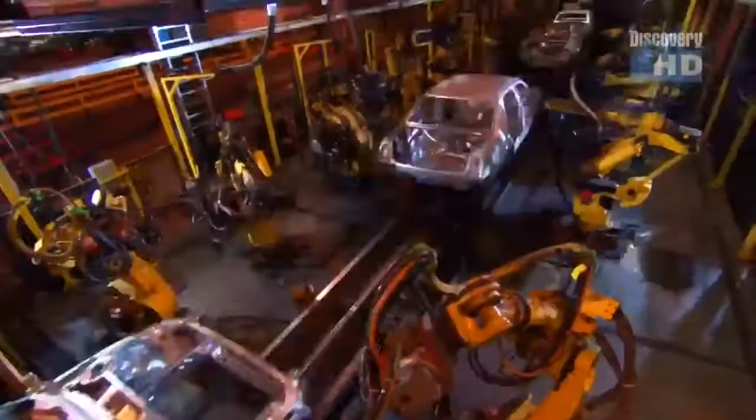The computing power of cars will be almost unlimited. As digital power increases, so will our safety, so will our productivity, so will our quality of life. We won't have to drive our cars. Someday, they will be driving us.

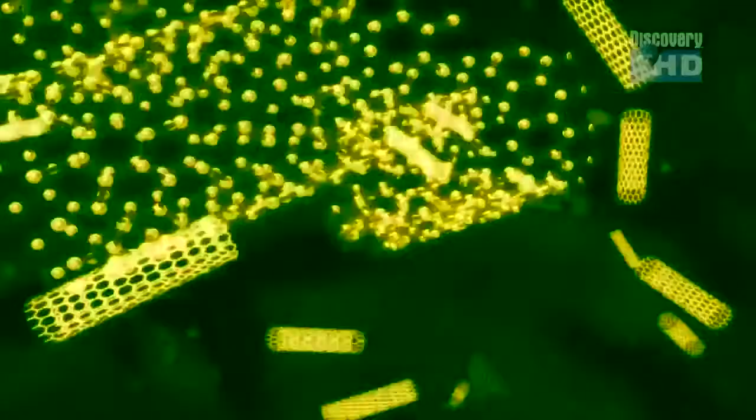The information processing capability of an automobile is very impressive today and is going to become extraordinarily more impressive in the future. The application of nanotechnology, artificial intelligence, and microsensor technology will shake everything up concerning our car.

It knows where you are. It knows where you're going. It knows what you want to do.

I'm always enchanted by truly autonomous machines that sense and think and act for themselves. Humans might see oncoming traffic from the side, but wouldn't measure the approach, distance, or speed the way that sensors could. So in 10 or 15 years, we expect cars will be able to drive through your neighborhood and understand the difference between a ball or a child and other cars on the road, and be able to stop and be as safe as a person driving, maybe even safer.

Red Whittaker and Chris Urmson of Carnegie Mellon University believe in the future of self-driving vehicles. They have taken up the DARPA Autonomous Vehicle Challenge, a competition sponsored by the Defense Department with the aim of sending unmanned vehicles into enemy territory. The results will affect how every one of us will be driven in the future.

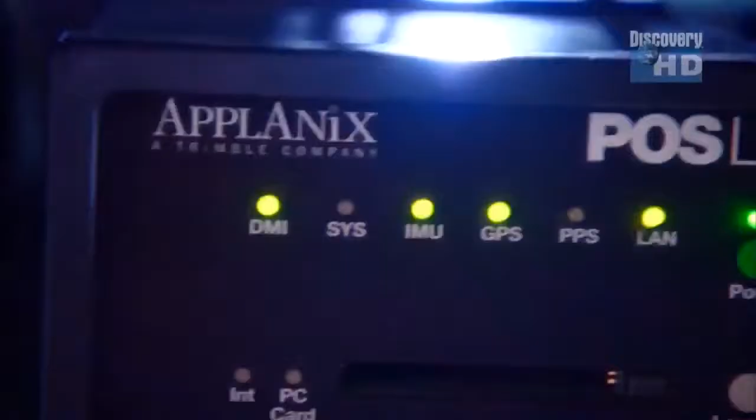The screen here is control; we have to turn the vehicle basically into a robot. It allows us to electronically control the steering and the indicator lighting, and it's the interface between the car and the computers. If we were to sit here while the robot was driving, we'd see the steering wheel move, we'd see the pedals move. It would be like there was an invisible person driving.

The Carnegie Mellon car is no different from what you drive now, except that your SUV doesn't have 10 Core 2 Duo computers, each sporting a gig of memory.

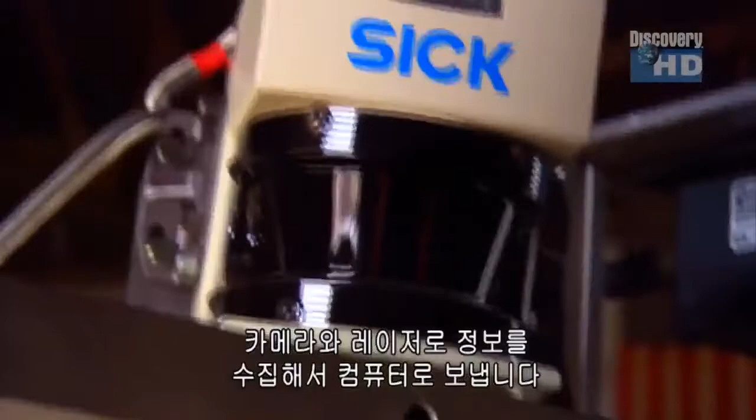We take the camera and the laser data and feed that to the computers, where we have algorithms that interpret the images from the camera and the shape of the ground from the lasers, and they figure out where the road is. From that, the robot will send an electrical signal up to a controller, which will turn the motors to steer the vehicle and press the brake and throttle to keep it moving at the right speed.

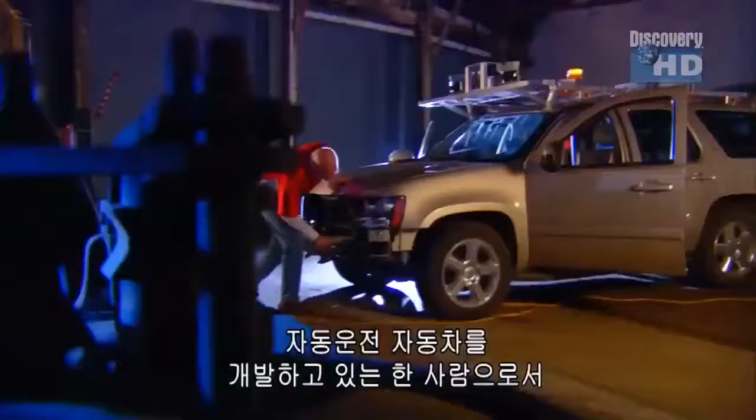It's one thing to talk about autonomous driving in theory, but what will it take for computer-driven cars to truly gain widespread acceptance? In automation, performance is only a small part; reliability is everything. To be accepted and used, the technology has to be rock solid. As a developer of autonomous driving machines, I am perfectly comfortable being driven by a computer. To get this far, this fast with computing opens a huge future possibility.

The day is coming when your car will be the most powerful computer you own. It will have a brain 10,000 times faster than yours, connected to you. And then, technology will plug you into the auto matrix. The car, the machine, will think, act, and drive. The day is coming.

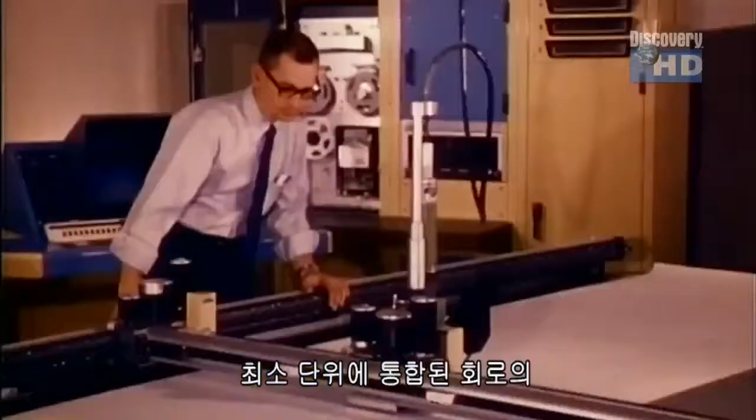But before there will ever be an auto matrix, before our cars will change the future of driving, we must look back to a man named Gordon Moore. In 1965, Gordon Moore, co-founder of Intel, observed that the complexity of integrated circuits with respect to minimum component cost doubles every 24 months. Translation: computers get twice as smart about every 2 years.

Think of a birthday card that you get in the mail that sings happy birthday to you. There's a chip in that birthday card that has more computing power than all the Allied forces of 1945. And what do you do with it? You throw it away in the garbage. That's Moore's Law. By 2030, computers and cars will have more than 3,000 times the processing power they have today.

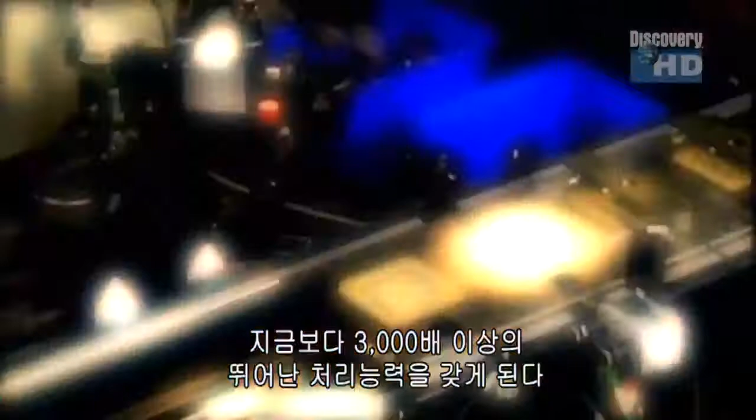Chips then will cost about a penny. So chips will be embedded by the billions in the roads, inside the car, everywhere around us.

My name is Michio Kaku, and this is my testimony about the future.

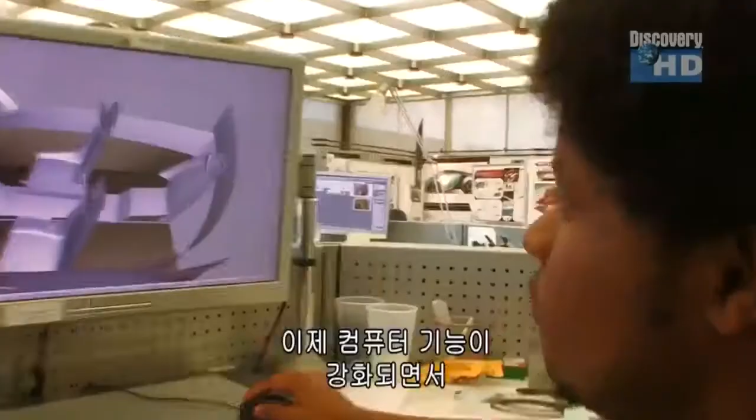Computation will be everywhere, almost like electricity. Electricity today, we don't even think about it. Now, with computer power doubling every 18 months, the car is the next place to be totally revolutionized.

But can all this technology make us better drivers? Wouldn't it be nicer to have a computer that senses the rhythms of your body so that when you doze off, it wakes you up? Think of how many lives such a simple device could save.

The first step towards ultimate safety in future cars can be seen in Switzerland and the world's most sensuous car. The sensor tries to influence the driver to be relaxed, to be attentive, and make him safer this way. The idea behind the sensor is really to get to the cause of the accident. The cause of the accident is the human being.

A biometric watch measures the driver's pulse. A mobile eye camera records his lane change behavior, as well as how close and at what speed he approaches cars ahead of him. An onboard computer uses special algorithms to evaluate the driver's current state of mind, and if necessary, it steps in to change things.

If you should be starting to fall asleep, you start to hear a generic sound which stimulates you. If you should be aggressive, you get to hear more chill-out type music, lounge music, to calm you down, to feel relaxed. A driver's emotional state is also affected by light.

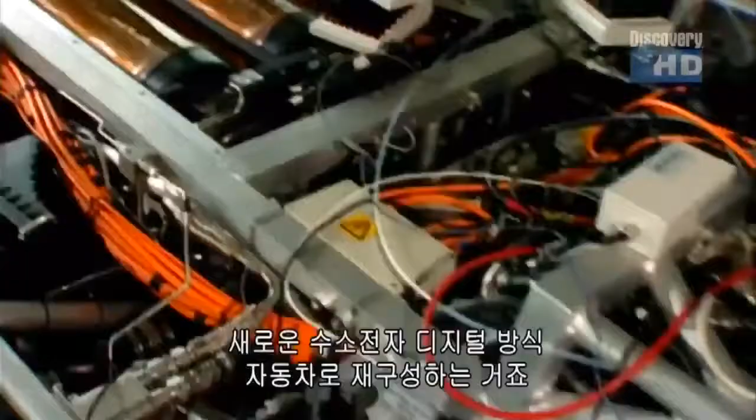We are on the brink of changing and rewiring, rewriting the DNA of the car, from the old mechanical internal combustion mode to a new hydrogen, electric, digital-based car.

As the electronic brains in cars get smarter, mechanical connections for steering, braking, and accelerating will give way to digital controls with lightning-fast response like a video game. It's called drive-by-wire, and with it, your car handles and responds exactly the way you want it to.

For example, brake-by-wire allows the vehicle to stop sooner than conventional hydraulic brakes do. It's like turning on a light switch and the light comes on immediately.

The thing that helps you get emotionally attached to your car is actually going to be delivered via software. The chassis dynamics, the way that the vehicle moves up and down when it goes over bumps, also can be controlled dynamically, and even the traction and the torque at each wheel.

And if your mood changes, your car can change right along with you. The auto industry is as much an entertainment industry and a fashion industry as it is a transportation industry. You'll be able to download performance profiles for your car the way you get ringtones for your cell phone.

Custom software is one more step towards a future when cars will do everything for us. And while that day is not here yet, young car designers like Matt Zoller of GM's Design Internship Program are already there. I love the idea of being able to break the mold, to create something new, something different, and be able to bring that to other people.

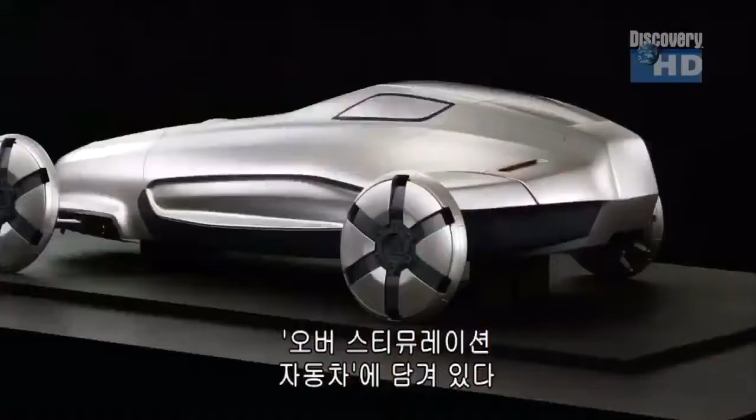His digital dream for the future is a concept he calls the overstimulation car. It's a one-seat car that totally consumes this person and creates a virtual mobile world for them to ride around in. There'd be holographic imagery.

You have menus scrolling, so you're in the world and you're experiencing it, but you're experiencing it in the way that you want to through this virtual driving, and really get a feel for this online community of cars that are driving down the road.

Cars will become members in a worldwide network. It's almost like an auto matrix in terms of the connectivity of the automobile with our everyday lives and everything that we're doing.

Cars locating wireless internet signals will require vehicle antennas that work consistently, perfectly. Whether it's satellite radio, GPS, or onboard wired and wireless systems, it's all part of the auto matrix. And the need to be precise with RF, or radio frequency wave testing, is critical.

This is the world's first vehicle-size, electronically modulated, spherical near-field antenna test system.

Part of our job is to make sure that the antennas we put on the car work as well as they can, and to make sure that when we put on different types of antennas, they don't start fighting amongst each other. When your car operates in the digital realm, crossing the wrong signals can be devastating.

At best, you might lose your onboard email connection or just get hopelessly lost. At worst, cars might literally end up driving blind. That's why Jana Lee Graham spends so much time testing RF signals.

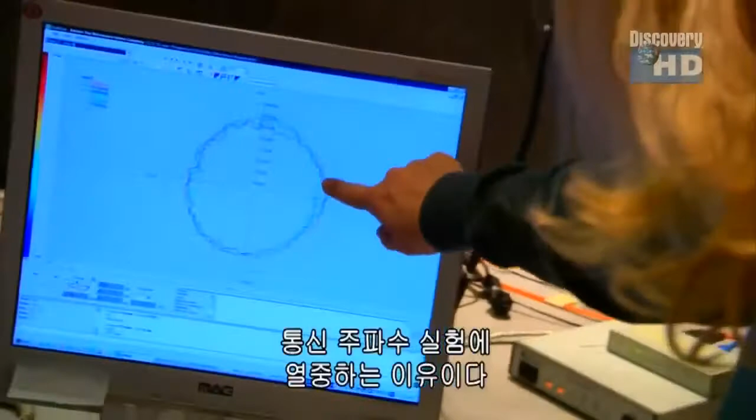When you look at our arch, we have 103 probes, and what they are doing is transmitting and receiving signals at all different elevation angles, just as if the vehicle was going up and down hills, or depending on what angle you are in response to the transmitting antenna. So radio frequency, or RF communication, is always smooth.

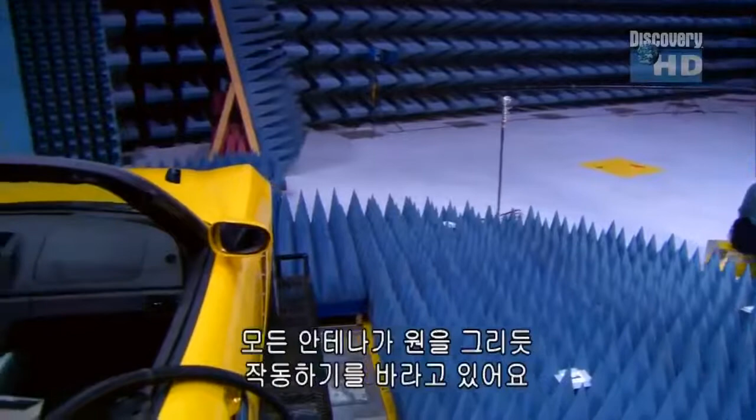The reason why we spin the turntable is to measure a second antenna parameter, and that is directionality. We would like all of our antennas to have a circular performance, so no matter what way you're driving, you can receive weak RF signals.

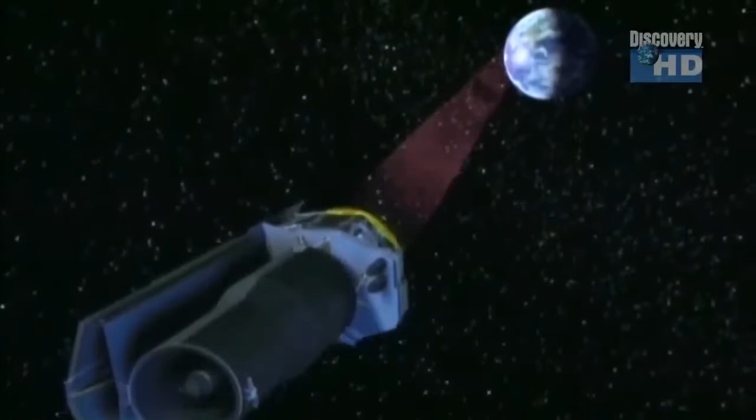Once we've completed an entire rotation of the turntable, we've then generated something that we call near-field data. This is in contrast to what would happen in the real world, where we'd have a satellite miles away from the vehicle. Jana Lee takes her near-field antenna results and mathematically extrapolates real-world information, hoping for a high level of gain.

The higher the gain, the better the antenna is at measuring weak signals. And why is this important? It's hard to know what frequencies future systems are going to come online. The RF spectrum, when you look at it, is getting very full. I think you're going to see more and more electronics on the vehicle be RF driven.

And who knows, eventually we may get to the point where we no longer even need to have wires inside the car. Maybe I'll be transmitting either fiber optics or through RF links.

The wireless car, built with micro-technology, providing the digital power to create the auto matrix. Circuitry so small, it's built on top of individual atoms and molecules.

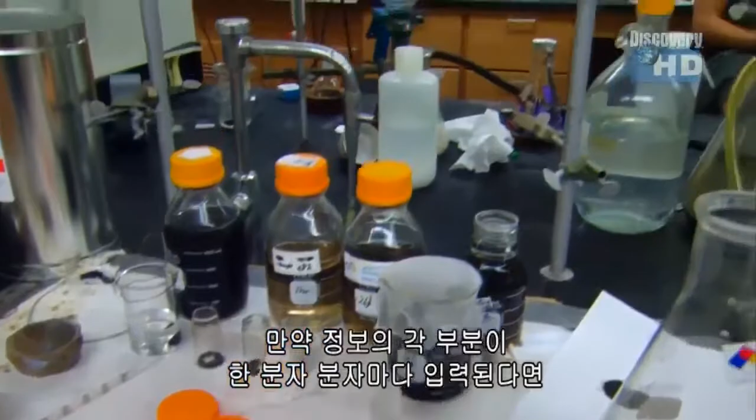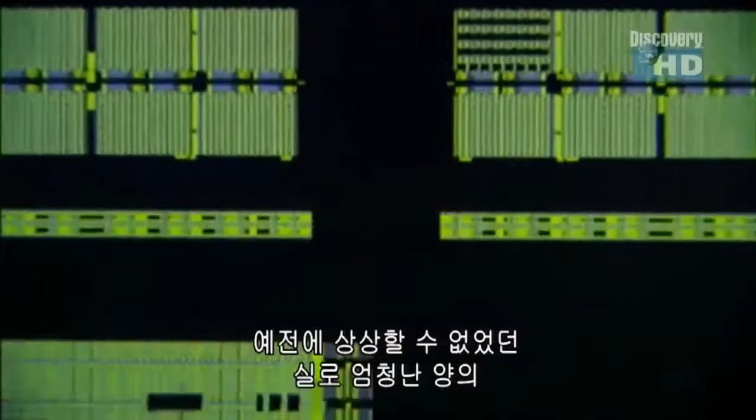So just how many transistors will fit on a circuit? Now let me give you an idea of how large a number that is.

500 sheets of paper is about 2.5 inches tall. Each transistor is represented by a single sheet of paper. If instead of having 500 sheets of paper, you had 6 times 10 to the 23rd sheets of paper, that stack of paper would reach from the Earth to the Sun. And not just once, it would reach 400 million times.

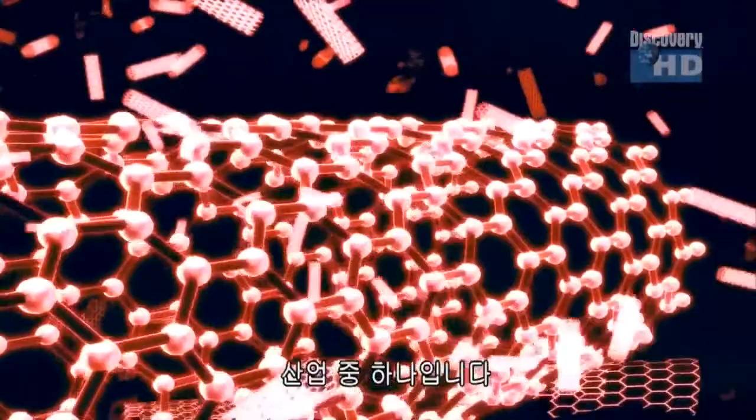The automotive industry would be one of the first commercial applications for all forms of nanotechnology, so that in 25 years, we could think of having the car have embedded electronic elements.

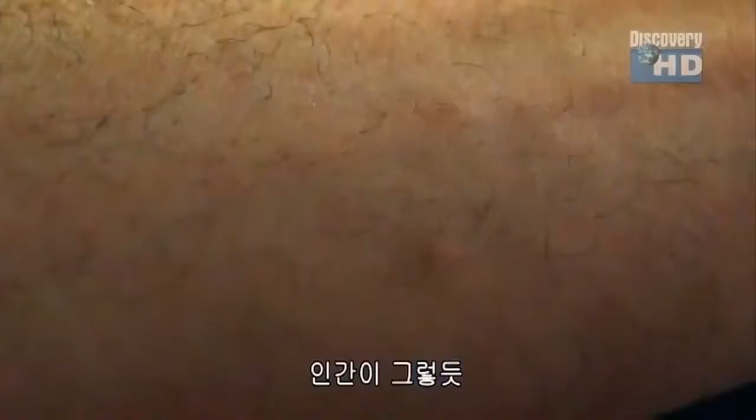Now imagine nanocircuits by the billions embedded into the surface of future cars. An electronic skin, sensing its environment and detecting damage. Humans do that - when we get scratched, our skin heals itself. And because of nanotechnology, when our cars get scratched, they will also heal themselves.

Think of what it means when we can start to have machines, entire machines the size of molecules. Think of what it means for sensors - a sensor that can detect pressure, a sensor that can detect corrosion, a sensor that can detect moisture.

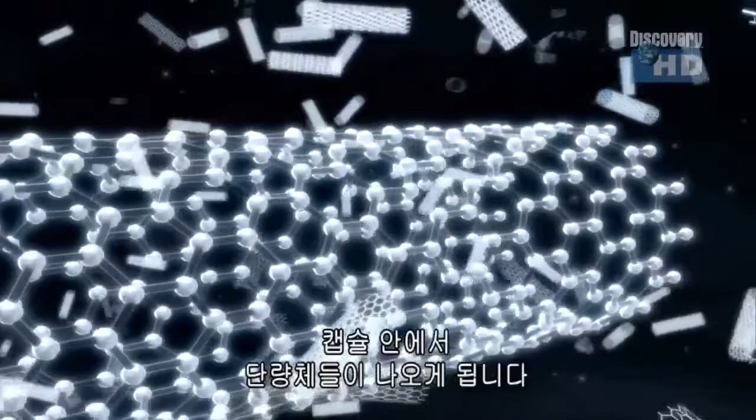How can a scratch be fixed by itself? You have to think about the chemistry of the coating. The coating is basically a polymer made up of a number of single chemical molecules, monomers, that have been fitted together. So if there's a scratch, we can send to the site, encapsulated, some of this chemical monomer. The signal would be for the capsule to open itself up, let out this monomer. The monomer can then interact with the polymer that's still there, the unscratched polymer, and fill up the scratch.

What that leads us to is thinking about the coating of the automobile as a system of multi-layers, very thin layers that can do different things.

Imagine never having to visit the body shop again, whether your car is scratched, or even if you simply want to change its color. Let's think about an automobile that could be black in the winter. When spring comes, it could flip a switch and allow the color to change from black to white. It's not only theoretically possible, it's in fact possible technically.

Do we need to stop at black and white? Perhaps not.

The future will be a new landscape. You'll still be able to climb into your car, crank up the music and escape, but in a car that always knows where it is, in a car that heals itself.

The Automatrix. The Automatrix. The Automatrix will be information. Will be safe. Will be directions. The Automatrix will be wireless. Will be free. The Automatrix will be everywhere.

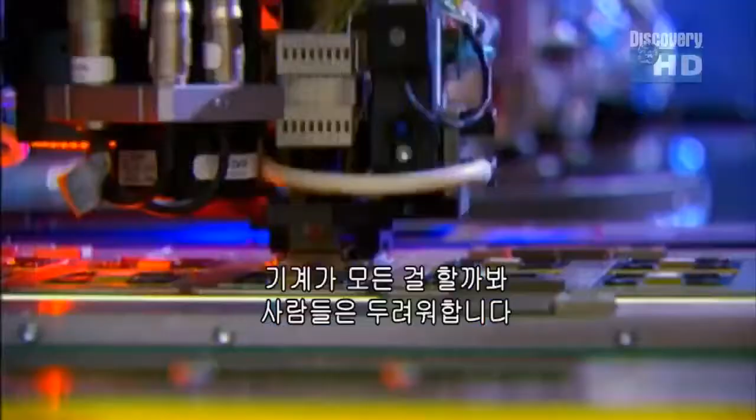Some people, when they hear the concept Automatrix, begin to shiver and fear that maybe the machines will take over. I think it's wonderful because it liberates us. We are headed towards the Automatrix.

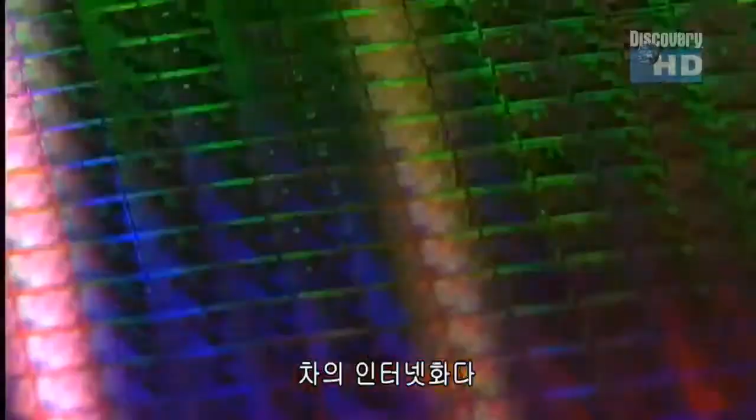Cars talking to cars, talking to roads, talking to traffic control centers, the worldwide vehicle web. And what that web will connect us to, above all else, is information.

We have to stop thinking about cars as merely transportation devices that take us from point A to point B, but rather think of them as being mobile information technology platforms.

Where we're headed is a world in which information is more and more embedded in the physical objects of our daily lives, in the environment, in the places that we travel through, and that creates a new role for the car.

Technically, this Automatrix is known as a telematics system, where cars communicate via digital wireless signals, much like the internet on wheels.

Information anywhere, anytime. Your files will follow you from your home to the car to your office seamlessly. That's the mantra of the future.

Seamless. The car will say, my calculation tells me you're going to be late for your first meeting today. How about I place a phone call and let the people that you're meeting with know? And in fact, the car itself could talk to these people.

It would probably say, take me to the grocery store, nearest grocery store. And it would do it.

If I come to my destination well-rested, I don't have to plan for that. If I come into a new city and I can immediately know where to park my car, if I know where my hotel is, where the restaurant I'm looking for is, there's enormous time savings and improvement in efficiency and really in quality of life if all those things are possible.

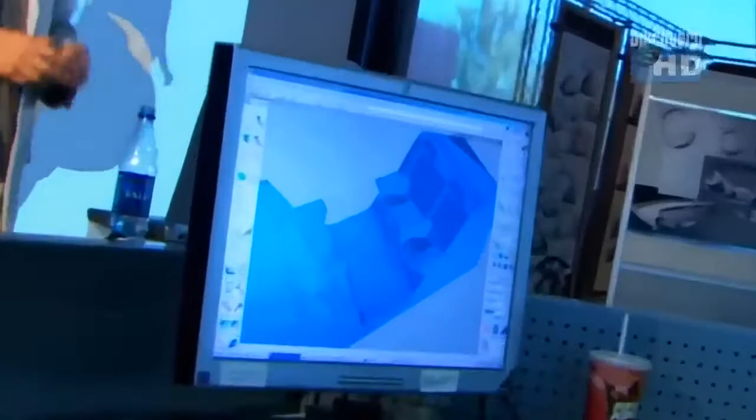It's not about how much gas you have or how much RPM anymore. It's about, I gotta go meet my friend Joe. So where's Joe on the map? The young designers of today, like Ryan Joyce of the GM Intern Design Program, are completely at home imagining cars as entertainment and social centers.

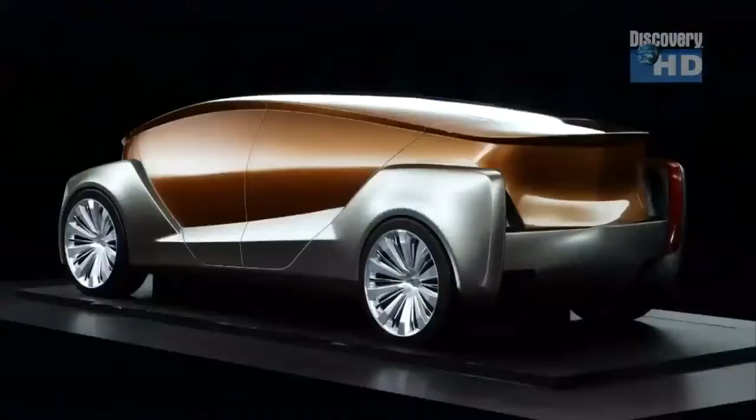My cocoon represents seating and driving in a new light. The actual dynamics of steering and navigating the car are going to become secondary to entertainment and communication. We have the opportunity to make the car into an extension of a movie theater. And that's what the cocoon has become, a comfortable place, isolated from the world passing around you.

We're delving into LCD windows, so when you are driving through Manhattan during rush hour, why not be in an island scene in Tahiti? Though he's envisioned this, it's not necessarily his idea of fun.

I enjoy driving way too much to ever want to completely give up the freedom and the passion. It's fun to drive a car, so we're not talking about taking control away from you if you don't want it to be taken away. We're talking about providing you with an assist, and computers are going to be underlying all of that.

Think of the Auto Matrix as optional. Beyond the considerations of safety and congestion, the Auto Matrix can be customized to whatever extent we choose. And that is because our cars play a different role in everyone's lives and will continue to do so in the future. One of the biggest challenges for car companies is going to be managing all that information that the driver has to deal with, as car companies start to engage the media industry and the communications industry and bring those things that people want into the vehicle.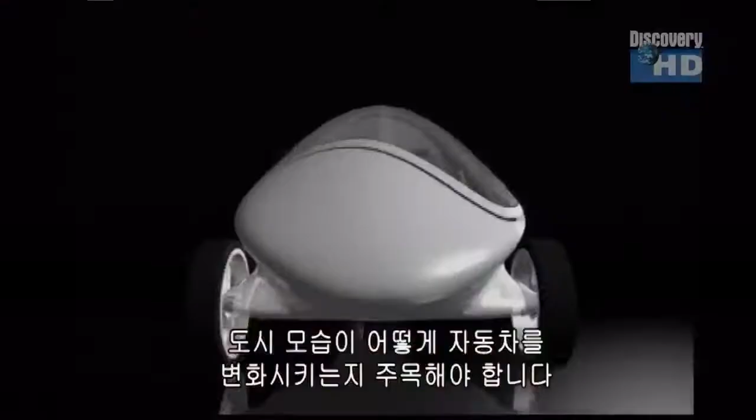We're going to start to see the shape of our cities change what the car looks like so that we can fit cars into those very crowded places. We're very excited about what technology has to offer to help reduce congestion.

No simple pill will serve as the perfect urban traffic decongestant. There will be a variety of remedies, one of which will come from the father of biodesign, the fluidity of forms, Luigi Colani. This thing will be the city driving machine for the future. If I do a design, I would like to have 90% nature and 10% Colani, then I'm very good. The birth-giving egg was the idea behind this extraordinary small street machine.

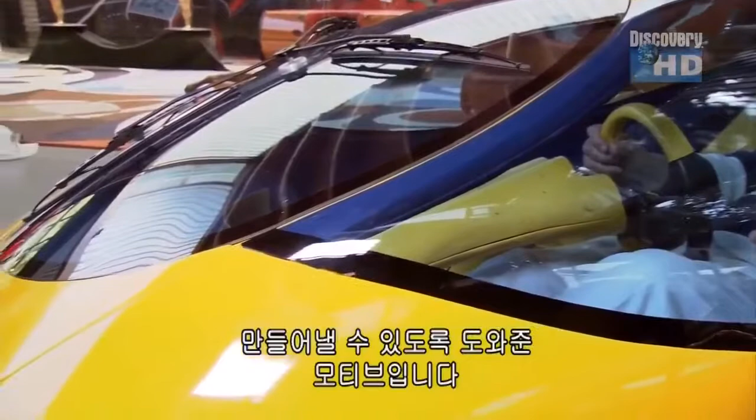Imagine Colani's eggs on city streets. More traffic moving down Main Street, but less gridlock. And Colani's eggs will use far less energy, thanks to his fluid aerodynamics and a creative use of materials. A vehicle made of 2 plastic halves and a tiny engine the size of a shoebox.

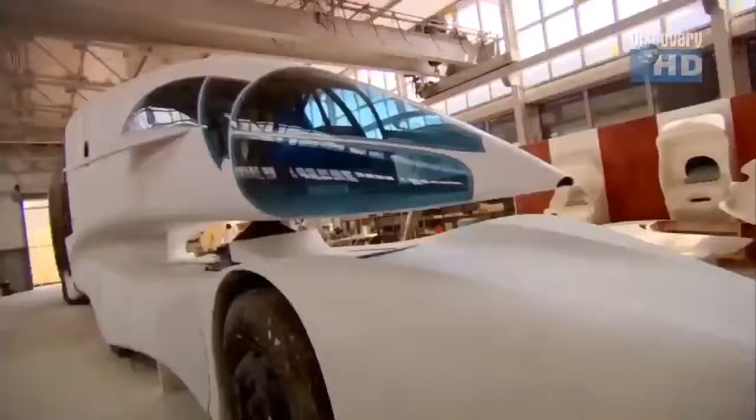I built it to beat the world record of consumption. There's nothing much which I haven't yet done. From aircraft to ships and submarines, I designed the most famous ladies' underwear. There's no question Luigi Colani has done it all, setting the standard for other designers with radical leanings.

My name is Benjamin Drew, and this is Clever, my vision of personal transport of the future. Clever stands for Compact Low Emission Vehicle for Urban Transport.

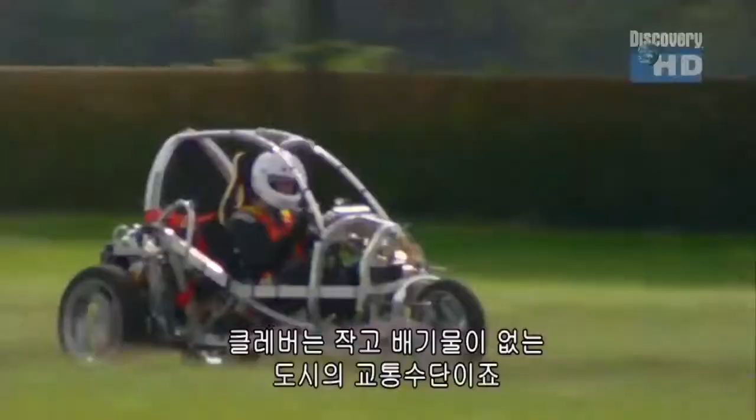Bath is very congested every day of the week, even Sundays. We have cars, SUVs, all these vehicles, and they've just got one person in them. Clever is a lot smaller, so we can fit 2 Clevers in the same space as one standard sized car or SUV, increasing the density of traffic. These sub-cars, or narrow track vehicles, represent a possible solution to these problems. One of the ideas behind this project is to highlight that this is a possibility for the future.

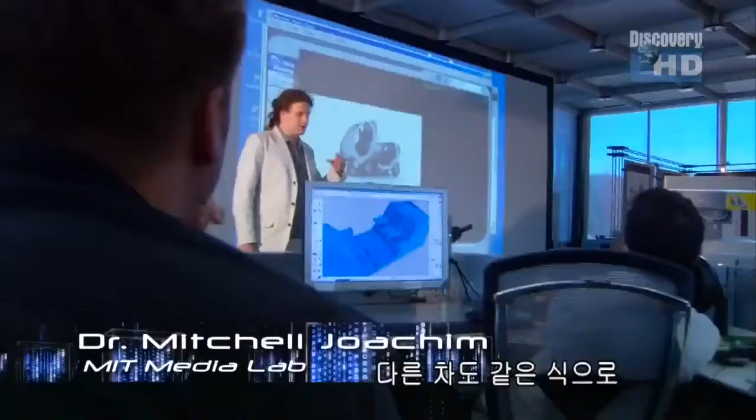So you have one of these cars, it's smart, and then another car comes, the frame tilts, reducing its footprint for parking. Another car marries itself into it, interlocks. The passenger gets out, the frame articulates again to compact the vehicle. This person goes away, and the next person comes into the new vehicle, taking the one in the front instead of the one in the back.

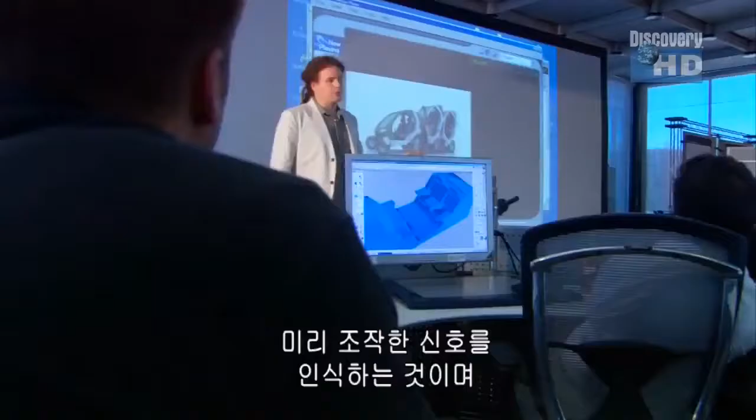If you noticed, she left in a green car. The car takes on her personal presets through RFID technology, and she gets inside and drives away.

Small cars are just the first step in avoiding the ultimate traffic jam. Step 2 is utilizing the streets differently. Driving around a major metropolis at rush hour is the ultimate game of chicken, with lots of vehicles speeding around, competing for what little space there is. But to the automakers, there's more space than meets the eye.

Now imagine you're in traffic and congestion, and you can have low-speed adaptive cruise control, where your car can be set so that the gap between you and the car in front of it is constant. As that car creeps forward in traffic, your car automatically creeps forward too. So as the car in front of you creeps along, so do you, but without riding the brakes.

By fitting just 20% of cars with adaptive cruise control, we can eliminate excessive braking. And that's not all we can eliminate.

There's no reason why in the future you couldn't have highways that don't even have lane markings. The vehicles themselves decide whether it's going to be more optimal to have 3 lanes at this speed under these weather conditions, or 4 lanes under another set of weather conditions.

When you look at traffic from above, you realize that cars have a lot of empty space between them. There's no reason why we can't travel at higher rates of speed, packed closer together. Imagine looking down with cars passing through at much higher rates of speed but not crashing with each other, because we're able to control and know precisely where each car is relative to every other car.

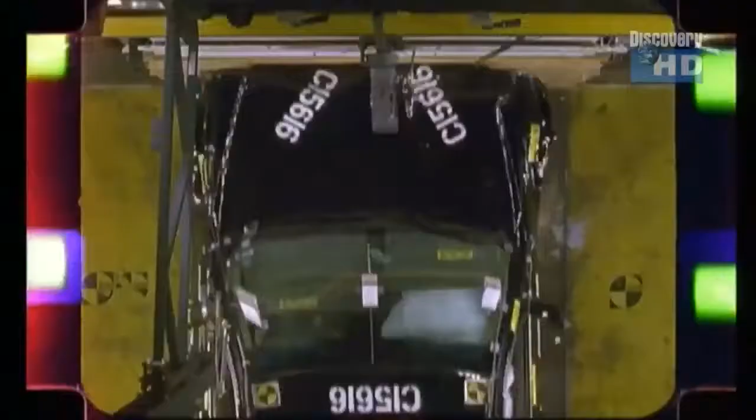But we're still a long way from taking the human element out of driving. In the auto industry, we don't like to use the word accident. Accident sounds like it's not our fault. It really is a crash. It's not an accident. And crashes we can eliminate.

As the DNA of cars changes from mechanically controlled machines to digital computation, will car crashes come to an end? Will computers help us prevent tragedy on the roadway?

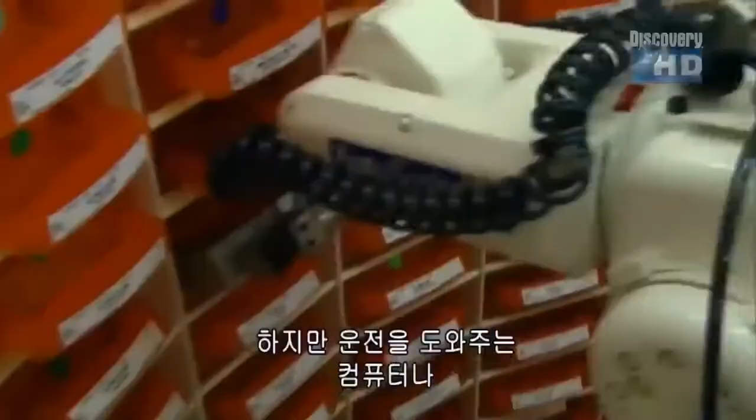Human beings are very good at doing complex tasks, but they're maybe not so good at doing simple tasks over and over again. And what I mean by that is that driving is a task that is very routine for the most part. It is so safe that people can actually become bored or become disengaged from the driving task. But the great thing about computers, about artificial systems that can help you drive, is that they never get distracted, they never get tired.

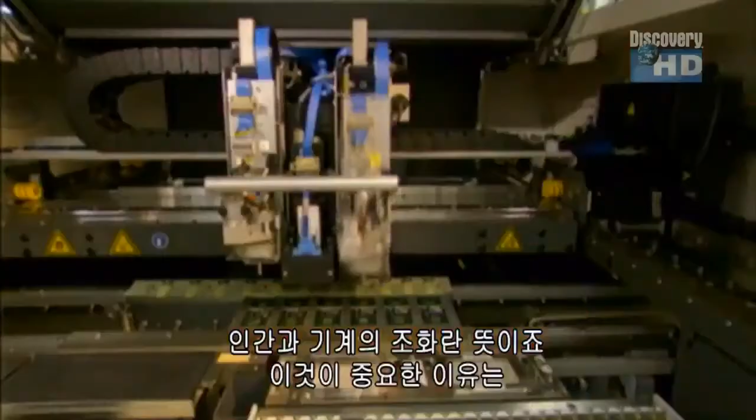Yet we all do know that humans make mistakes. In research on driving these days, you hear a lot about HMI, or the human-machine interface. The reason that's so important now is that cars are becoming much more active in driving than they used to be. The car is beginning to become almost a co-driver with the human driver. And at one end of that, of course, would be automatic driving, cars that literally drive themselves.

And at some point, I have no doubt that it will be possible to do much better than all human drivers. Most people think of themselves as great drivers, but we need to face facts. The numbers are not on our side.

The number of people who are killed every year in the United States in highway traffic accidents is nearly equivalent to two fully loaded 747s crashing every week. That's 45,000 Americans every year. Traffic accidents rank 10th as the cause of mortality on the planet.

And digital technology can make it all go away. Vision, my goal is to basically incorporate technologies into future automobiles such that as an end goal, the number of fatalities from accidents goes down to zero. That's the headline that I would like to see.

My name is Francis Memley, and I'm going to give you my thoughts on the future of automotive safety technology.

42% of all fatalities can be linked to the vehicle leaving the road, either due to drowsiness, distraction, or just not paying attention. Government testing has shown that lane departure warning systems reduce traffic accidents on the order of 70%.

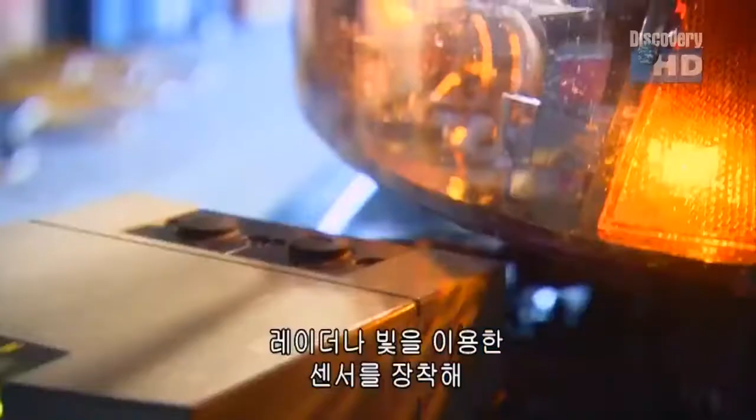By the year 2030, we certainly can imagine automobiles that don't crash. And today, we have technologies that are clearly on the roadmap to that future. Collision avoidance systems, for example. We have sensors based on radar or LiDAR sensors that actually can detect whether there's an object up the road and give our drivers heads up or advance notice that there's an object coming.

Not only can computers allow vehicles to essentially see and sense what's around them, but can process that information very quickly. There is no question that there will be artificial vision of some form in vehicles in the future.

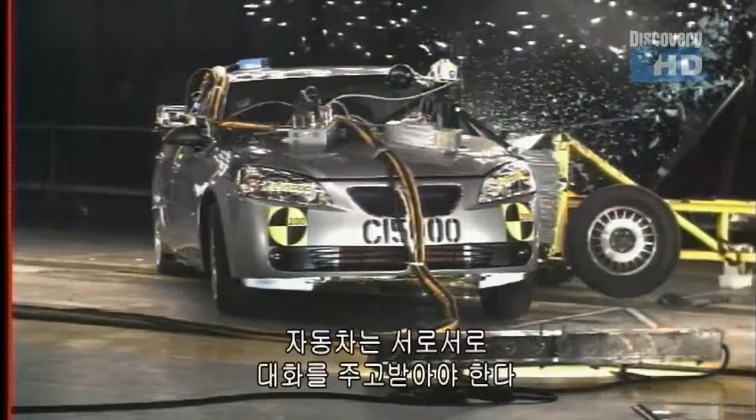In order to achieve a crash-free world, our cars must be communicating with one another, all guided by the smart roadways they travel on. Already, there are telematic highways in Wales, and sensors are being used on roadways in smart corridors of Southern California. Cars will be communicating their locations within a precision of less than a meter and being able to communicate within milliseconds.

What makes engineers believe that they can achieve this mathematical precision with cars? Think today about subway stations. It's always amazing to me to watch that crowd of people walking very fast toward each other but never bumping into each other. So we know that the algorithms exist, the controls exist in our mind to allow us to avoid those kinds of crashes. Now imagine an intersection with cars approaching from all directions. Can we take that same logic and incorporate it into the driving task autonomously?

These intuitive algorithms are being tested among small fleets today, where two or three cars successfully communicate and keep track of one another. The next step, a global network. Let's look ahead 15 years. This kind of networking technology will be common in all cars.

Before computer-aided systems are put out on the roadways, extensive simulations are done, like testing the reaction time of machines versus humans. This demo is a good example of how technology can help a driver. The driver hit the brake 1.3 seconds after the computer. That time difference of a second or more could be the difference between having an accident or not having an accident.

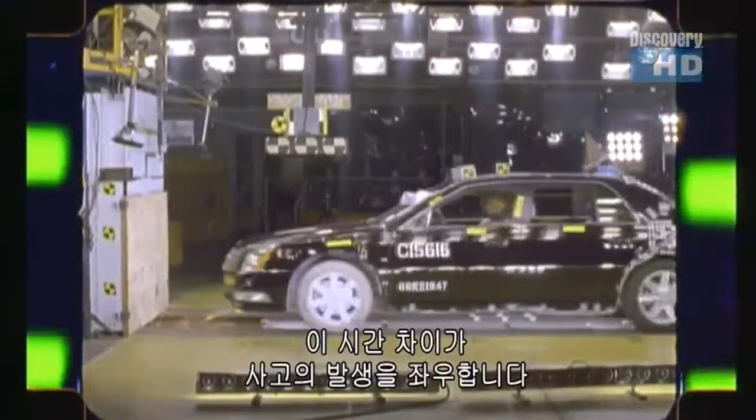What happens in virtual simulations will ultimately make its way into our cars, and the driving experience will expand as computers show drivers far more than just what their eyes can see. Here is a next generation technology which, while you're driving, superimposes video on the windshield. So as you're driving, you get to see artificial lines showing the lane in which you're driving, and you see that the left turn arrow was superimposed.

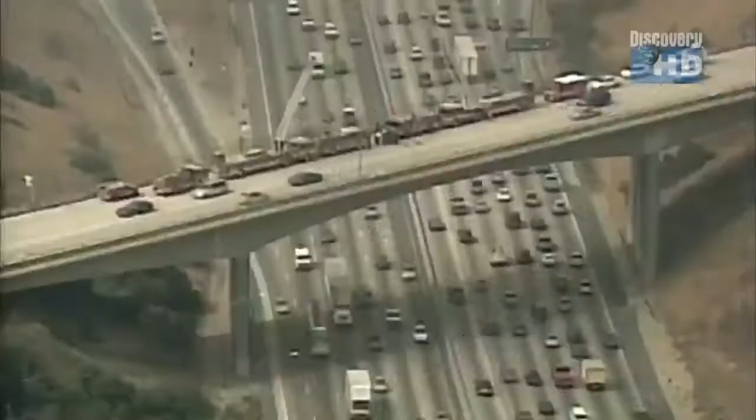The technology that you see here is available today. It would take about 5 years for it to be in vehicles that you can buy. The death toll on the highways could become a thing of the past, some quaint thing we look back and say, how did we tolerate that?

As cars get more brain power, as they become more connected inside the auto matrix, we'll approach a time when we will no longer share the work of driving with them. We will give it all to them. We will begin to view them as creatures who work for us, as robots. The robot will not be distracted, so it's a servant that has to do what you want. Not surprisingly, the word robot comes from the Czech word meaning worker. They never complain and they never go on strike.

So when your garage is full of robots, you won't even have to tell the vehicle where you want to go. You'll simply go in and say, let's go. And the vehicle will know where to go.

Robots are not unique in the automotive industry. They already work around the clock building the cars that will end up in your garage. And as you drive to work tomorrow, keep an eye out for robotic highway helpers.

There are several advantages to using robotic safety barrels. First, it's a very time-consuming task to deploy, retrieve, and build a safe work zone for the workers. The second big issue is it's a dangerous job to move these barrels into place at the beginning and end of each workday. If we can automate that process, it will be cheaper, faster, and more safe.

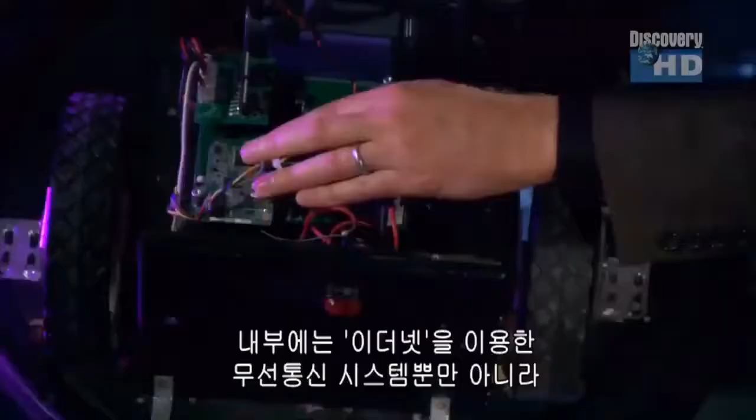This is a typical barrel robot. It has two wheels that are powered. In the back is a caster, just like on a grocery cart, that can move in any direction. Inside is a computer and electronics, as well as a communication system that's wireless Ethernet, 802.11, just like in your home.

I think that in the future, many cars will essentially be robots, because robots are really better suited to a task like driving, which, let's face it, for the most part, is very boring. That's why we fall asleep at the wheel.

But computers never get tired or distracted. If they're designed properly, they're always perfectly attentive to the factors that matter in order to keep you safe while on the road.

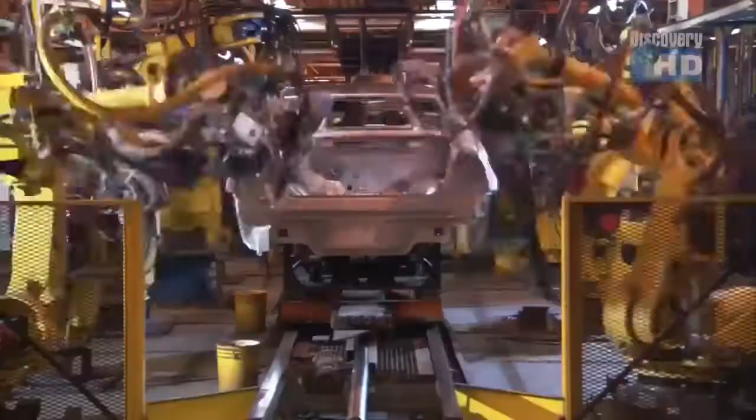Today, robots build your car. Robots fix the roads. And though they may not be in the driver's seat yet, there are robots in your car right now.

ABS, the anti-lock braking system, when you apply the brakes, it starts to pulsate if it encounters slippery conditions. Now that's helpful, but you didn't do it. Thank you, robot. And already, backup obstacle collision warning systems let you know when there's an obstacle behind you.

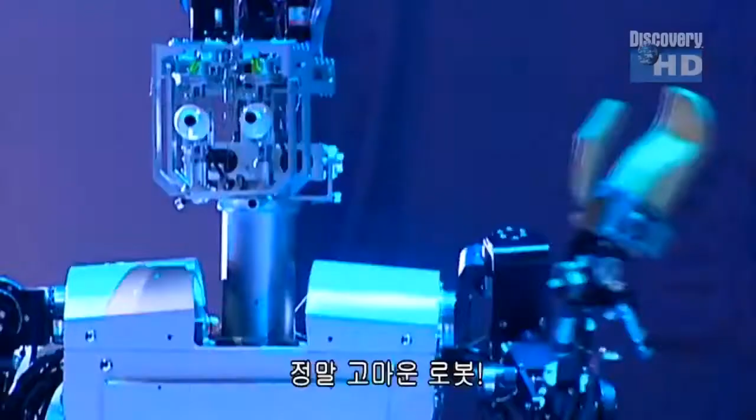Thanks again, robot. You will see more and more of the driving functions being taken over by the automobile until eventually, yes, it will be possible to simply tell the vehicle where you want to go and it'll take you there. Wouldn't you feel safer knowing that the other vehicles are being controlled by systems that have been tested for reliability, that are never drowsy, that are never intoxicated, that are never talking on the cell phone when they shouldn't be? Robot cars, acting for us.

Doing the big things, doing the little things. Like cars that already park themselves. Think of a car with radar based inside the fenders, such that you can triangulate exactly how much room you have to park. The computer chips then take over the steering wheel and park the car for you.

Just imagine what they'll do next. The time is coming when driving will be fully autonomous, a job assigned to our robots. Robot cars will be so safe and efficient that Bo Park, a young GM design intern, can imagine a time when we even trust our children to them.

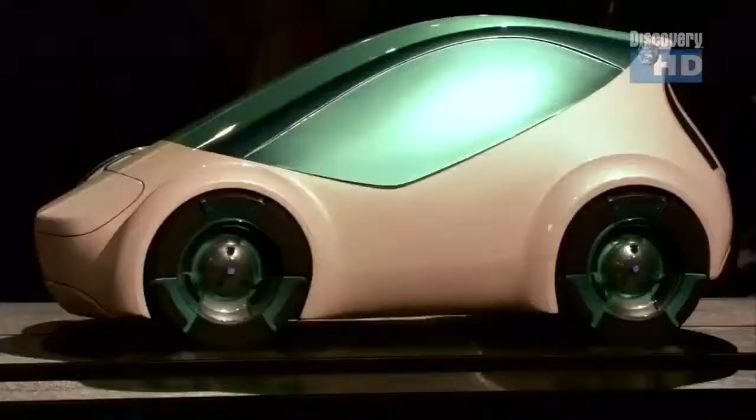My vehicle is only for one person, kids aged between 8 and 14 who cannot drive. If you don't have the time to drive the kids to school, why not let the robot do it? Bo's nanny car is just one of the unique possibilities that autonomous vehicles will offer us.

We'll get out of the home, into the car. The car will pretty much drive itself, park itself, analyze traffic anomalies all by itself. And on the windshield, you'll be able to enjoy movies, the internet. Anything you can do at home, you can do in your car.

You're going to be driving so fast that it would probably make you panic if you saw it. So they'll black that out, and the inside of your windscreen will become your computer terminal. The car as kind of a robot, a car making choices on our behalf, protecting us from danger.

So future cars will drive by themselves. Some do already. And if Moore's Law has taught us anything, your car is right behind. It is not a trivial problem to come up with the first artificial driver, the first robot driver that will be able to see the road ahead and react to it as well or better than a human driver. But once you have one of those, you can make them in multiple copies very rapidly.

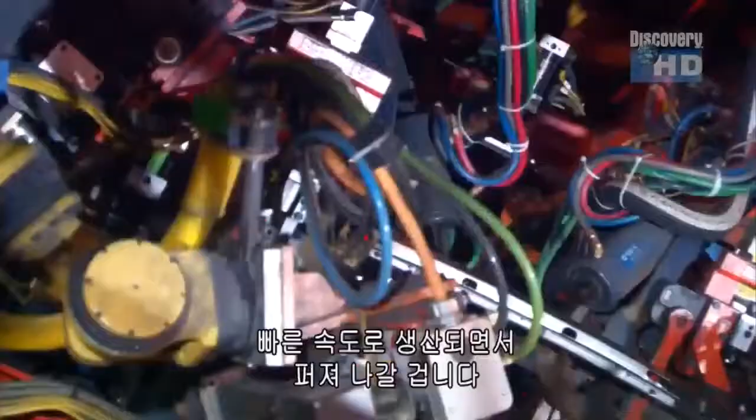Digital technology is catapulting us and our cars into a completely new automotive landscape. One where our cars will let us know when we need to wake up or calm down. One where hundreds of radio frequencies will operate simultaneously and seamlessly. It will be a world where our cars will heal themselves, communicate to other cars around them, and even, as we have dreamed of for so long, get us there safely without any help from us.

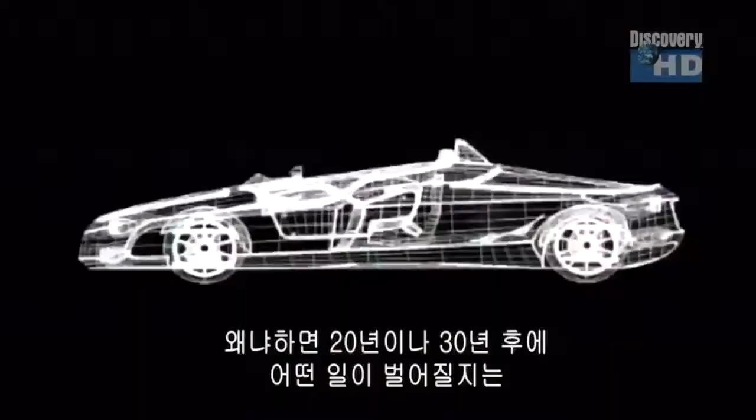I'm very excited about the future of cars because I think that what will happen 20 or 30 years from now is essentially unimaginable today.